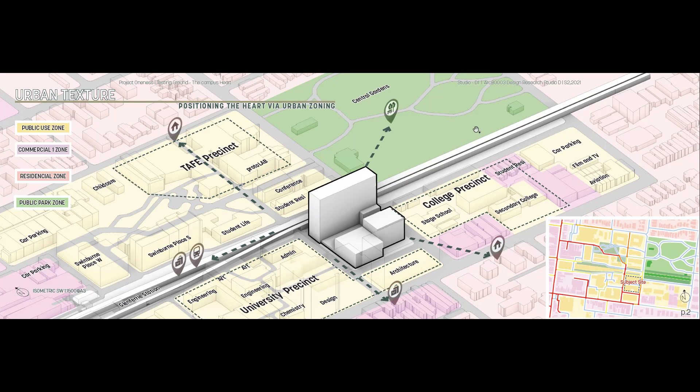The campus of Heart includes buildings BA, LB, and Atrium. Both buildings have served Swinburne for 50 years. The railway corridor has already been embedded on the northern side of BA since day one.

We benefit from the railway corridor on the northern side and the parkland to the east. We will have more than 35 meters building-to-building distance, and it will last for a very long time, meaning we will have excellent north and east sunlight access to the project site.

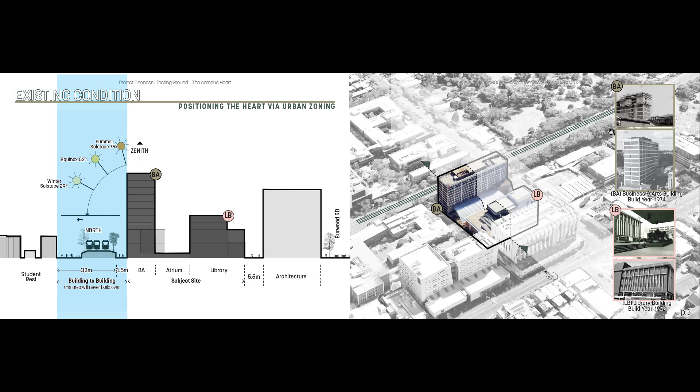So I constructed the design vision into 4 principles: the first is light, prioritizing sunlight access in the design proposal. The user will be able to experience a sense of season change and connection with nature.

The proposed building should increase creativity and inspire people. The internal traffic of the building and the use of space should encourage people interaction and thinking outside of the box.

With the unique location of the site, the proposed building should encourage local residents, authorities, and university activity to all happen under one roof. The freedom of wanting accessible, open space, and inclusive welcoming are built into the building, aiming to improve the day-to-day routine and strengthen the local community.

To support the 4 design visions, I have 4 design moves to accompany that. I approached with a philosophical concept which originally defined the existence of human beings, the simple one as a fourfold.

Mankind is not only a being in the world, but part of the fourfold of sky, mortal, earth, and divinity, which will refer to 4 design moves.

First, reclaim the ground floor space for the public good and improve the walking experience with the proposed building. Second, the building under the sky, designed from the angle of the sun and orbit of the earth.

Third, the building should be designed for better interaction and activity space. Fourth, that is an important part to bring the soul into an architectural object and reinforce it with positive user experience.

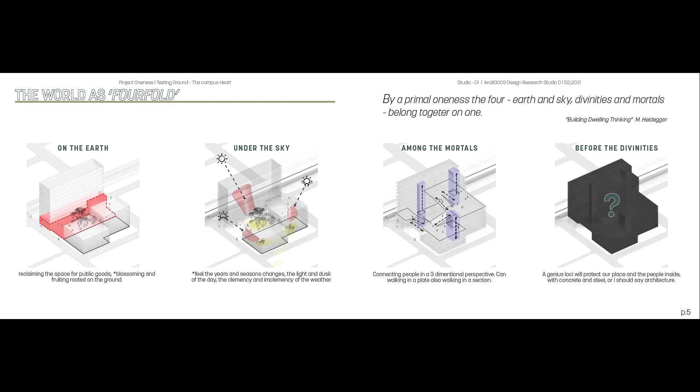Using walk score simulation to optimize the foot traffic on the site, I worked out by disconnecting the atrium pathway and providing direct connection between John Street and George Street. We were able to double the foot traffic in front of the proposed building. To achieve that, the ground floor of the BA building and atrium are to be demolished.

By simulating the direct sunlight access to the floor plate, we are able to change the sun angle, filter the summer sun, and invite the gentle sun into the building. I propose 3 light courts which will capture the morning sun, midday sun, and afternoon sun during winter, spring, and autumn.

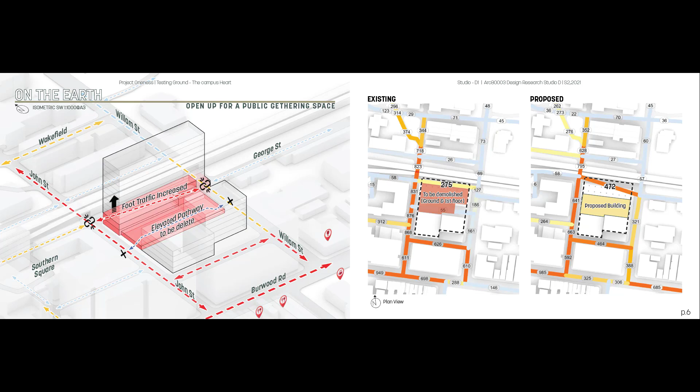With the floor penetration done and ground floor deleted, we lose 11% of the floor space, but gain 8% more sunlight access to the building.

By the end of the design development, we achieve 15% more gross area and 22% more direct sunlight by retrofitting existing buildings.

I propose an extra circulation as a beautiful journey to connect all the major programs. The arterial of the space connects with the existing roof into one continuous open space with stairs and ramps.

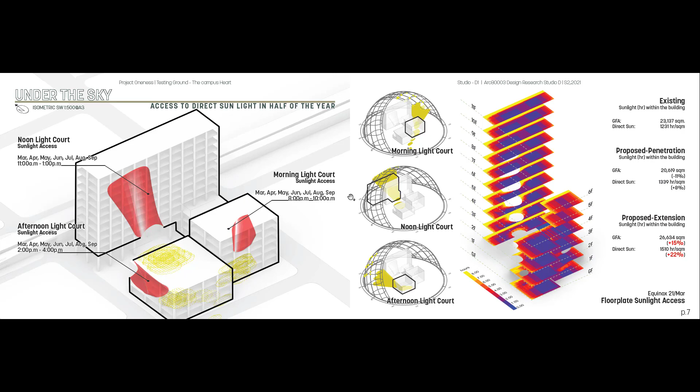On the northern side of the building, I propose the ground floor to 5th floor as a mixed-use space. The 6th to 7th floor will be a future lab, which will have double ceiling height and direct access to the roof terrace to operate large equipment and material testing.

The BA research building will relocate to the 8th to 11th floors. The library on the southern side will combine with exhibition and gallery function from the ground floor to the 6th floor.

Now the precinct of Heart is ready to welcome visitors from all directions. As we gave the ground floor back to the public, inviting sunlight to the ground, the garden area becomes the gathering point.

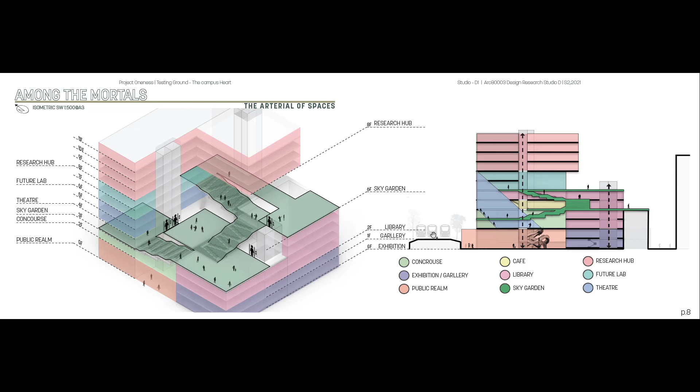We're able to nurture blossom and fruit inside the building and celebrate the gift from nature. With all people using the space, all the design moves give us a strong foundation to support the activity inside the building.

From the ground floor community space, we will be able to have new activity under the roof. It could be a Sunday market, university open day, or temporary functional space which could allow vehicle access. Stairs and bridges connect into one multifunction space.

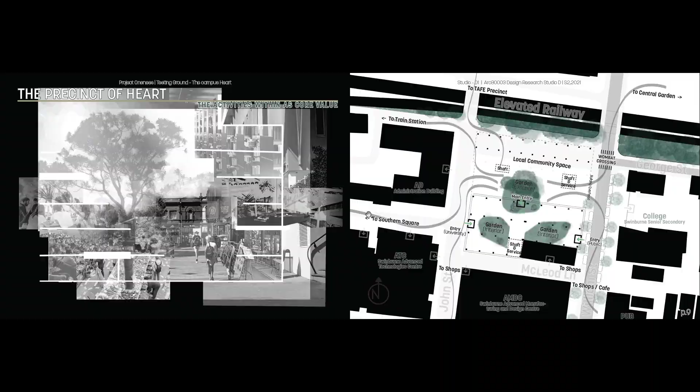Spiral stairs let you walk between trees and birds, bathe in sunlight, and walk towards the upper floor. From the main entrance, we have 3 light courts which provide vertical access to the upper floor.

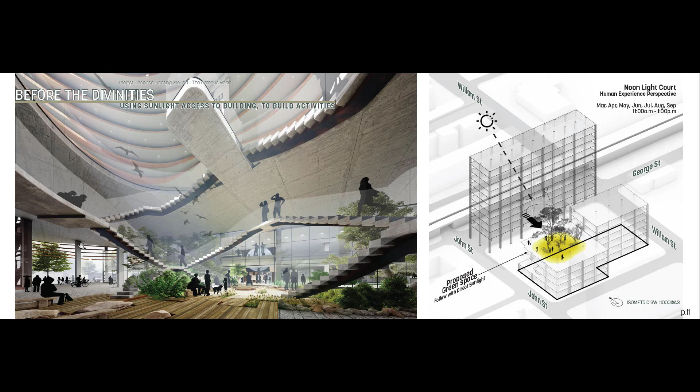The last thing is the roof terrace, which will allow for a 500 mm set down from the finished floor level to the soil. Terrace and stairs will connect from concourse level to the public theatre, library, cafe, and future lab. The external stair is a combination of accessible ramp, green space, sitting area, and stormwater collection.

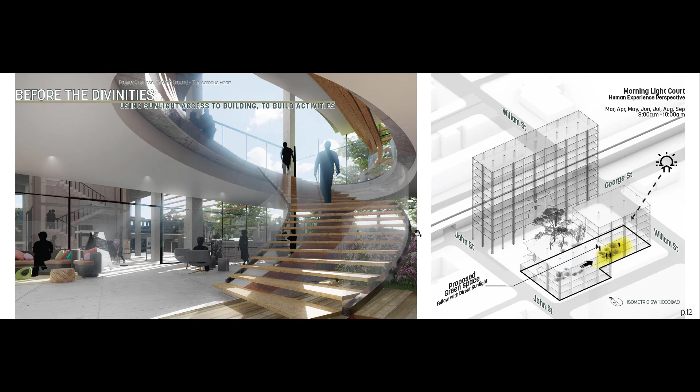Concrete panel boxes are separate compartments to the staircase, which will allow soil maintenance or replacement of the whole components. People inside the building could have bare feet on the grass, shoes on running up the stairs, wheelchair access up from the ramp, and sit under the sky with nature around.